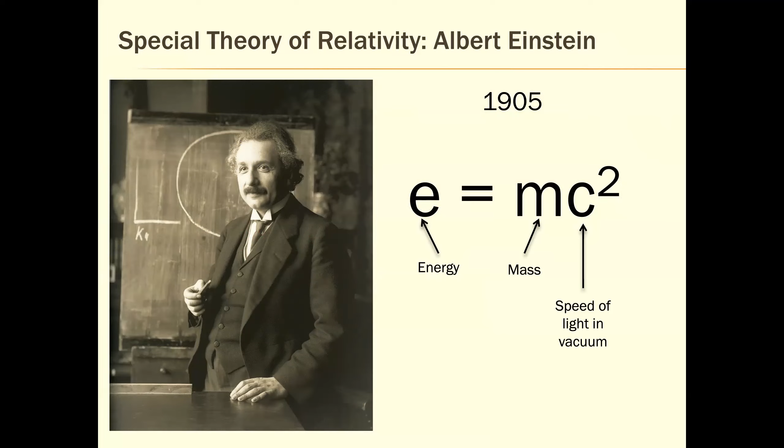Worldwide consumption of energy in barrels of oil equivalent, as of a couple of years ago, and I don't think it's changed much, was 118,300,000,000 barrels of crude oil. So we didn't consume that much oil, but we consumed energy equivalent to that much oil.

Energy is stored in fossil fuels in chemical bonds, and we combust those chemicals in order to extract that energy. And of course, this also leads to emissions of CO2, amongst other things.

If we could convert mass to energy by E equals mc squared, we could obtain the same amount of energy from only 8,055 kilograms, which is 3.2 of the new Tesla Model X's per year. So if we could convert 3.2 Teslas to energy with 100% efficiency, that would meet the energy needs of the world per year, in principle.

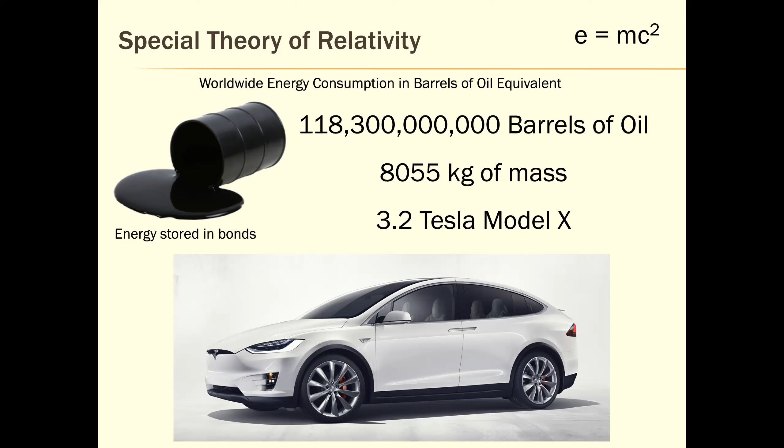Of course, we have no technology to do so, but things started to change in 1938 when two scientists, Hahn and Strassman, found experimental evidence for the fissioning of uranium via neutron irradiation and proposed the possibility of a sustained chain reaction in a nuclear reactor.

They weren't the first to come up with this idea. I think it had been around maybe about 6 years. Leo Szilard, I think, was the first to propose it, but they came up with some experimental evidence.

In essence, what they found was if you had a fissile isotope of uranium, in this case uranium-235, and a neutron interacts with that nucleus, with the neutron traveling at the appropriate speed, you will convert the 235 nucleus to uranium-236, which is very unstable and basically explodes into two fission products, as well as additional neutrons. These additional neutrons can then cause the same reaction for another uranium-235, so it can be a self-sustaining chain reaction, and it can also be an out-of-control chain reaction if the conditions are right. The applications are in commercial generation of energy with the controlled reaction, and the uncontrolled reaction in nuclear weapons.

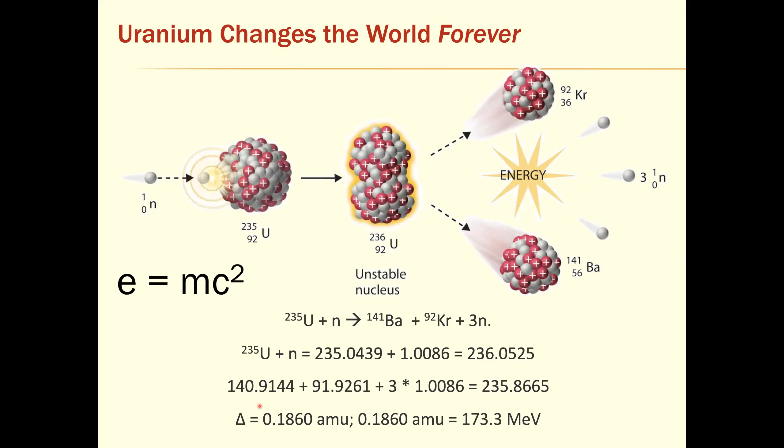This nuclear reaction releases a tremendous amount of energy. This is not like the primitive burning of fossil fuels where you release a little bit of energy that's been tied up in chemical bonds for millions of years, but rather it is conversion of mass to energy. If you add up what's on the left side, the neutron and the uranium-235 nucleus, and what's on the right side, you'll notice they don't balance in terms of mass. This fission process has destroyed, well, 0.186 atomic mass units has ceased to exist. In fact it's become energy, 173.3 mega electron volts. So there's an absolutely tremendous amount of energy available if we can split fissile isotopes in a safe and controlled fashion.

One uranium fuel pellet for a typical reactor is about the size of the end part of your finger. A dime is given there for scale. If we reprocess and recycle spent nuclear fuel, and use breeder reactor technologies, which I'm not going to talk much about but will mention again in a few minutes, they allow us to convert the non-fissile isotopes of uranium, which are the most abundant in nature, to fissile plutonium and burn that. If we do both of those things, one fuel pellet will give us as much energy as burning 300 barrels of oil, or 100 tons of coal, or 1.67 million cubic feet of natural gas. So the energy density of uranium is extraordinary.

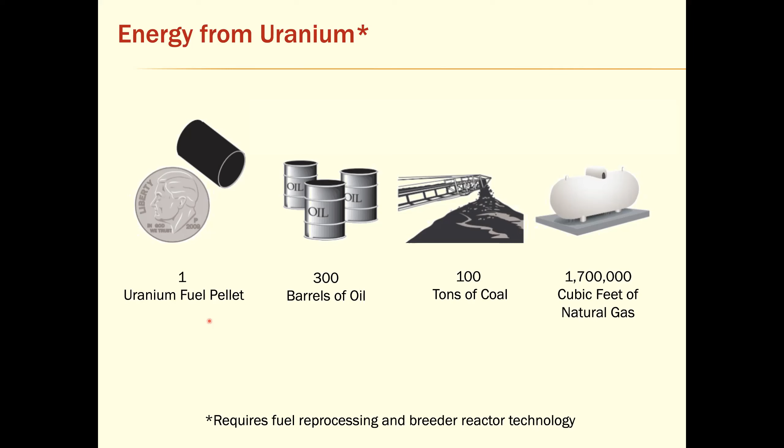This is the nuclear fuel cycle. It's my own illustration of it, because I never could find one I completely liked, but there are many different versions, essentially the same thing. We all know about nuclear reactors, of course. In fact, our electricity here tonight could very well be coming from the Cook power plant up at Lake Michigan.

But we don't often think about the other parts of the fuel cycle. So what I have up here is what we call the front end of the fuel cycle, the parts that occur before the reactor, and then the back end, which is essentially how you manage all the waste. At the front end, first you find uranium and mine it. It is possible also to run a thorium cycle, but in the US we currently don't. So you mine uranium, do whatever chemical processes you have to do to recover and concentrate it. Then for an American-style reactor, at least, we need to do enrichment of the 235 isotope. Out of the ground, uranium is 0.7% of the 235 isotope, and we enrich it to the 4 to 5 percent range for American reactor fuel.

And that's done in centrifuges, normally using uranium hexafluoride. Then it's converted to an oxide, fabricated into a fuel, and it goes into the plant, the actual nuclear reactor.

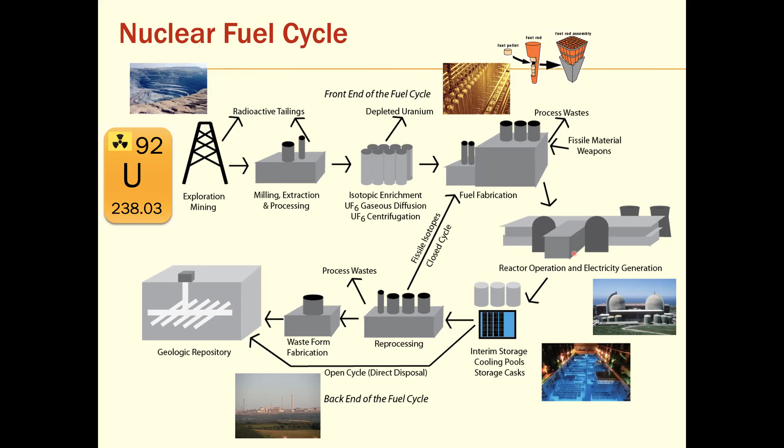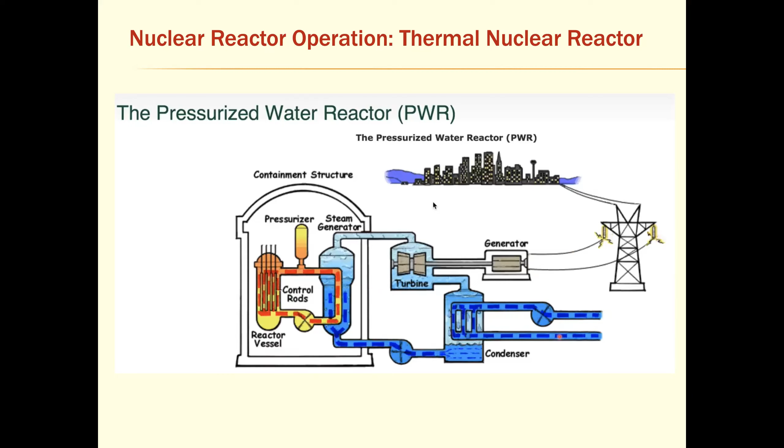This shows one of two major designs in use in the United States today: the pressurized water reactor. The reactor vessel is here, with control rods and containment around it, and then there's another big containment structure. There's one circuit of pressurized water that cools the core, then a steam generator with a second cycle that drives a turbine, and a third cycle that condenses that water to complete the cycle. So basically three closed loops of water. This is a very safe design because the chances of water being released out here are very, very low—you'd have to have multiple failures.

There's also the boiling water reactor. There are still a few of these left in the US, and it's a bit different because it only has two cycles, two circuits of water. You boil water in the reactor, creating steam that drives the turbine, and then that's condensed over here and sent back into the core.

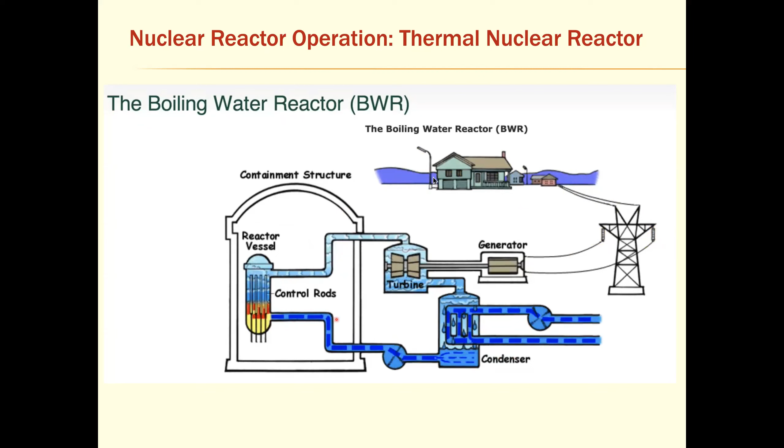Okay, nuclear is clean. Well, it depends how you want to count clean, I suppose, but what we've come to realize in recent decades, especially recent years, is that greenhouse gas emissions are a very major issue. So certainly nuclear is extremely clean relative to the emission of greenhouse gases. I give you here data from the literature, basically the amount of greenhouse gas emissions per gigawatt hour of annual electricity produced. You might wonder why nuclear isn't zero, since you're using a nuclear reactor, but you have to account for construction of the plant, which used concrete, and the mining of uranium, enrichment, and so on. So the life cycle is about 3 tons per gigawatt, whereas coal's 820.

Wind and solar are very similar to nuclear, again because they have to be constructed out of mined materials, transported, and so on. So coal and oil are the worst. Lignite is the worst of the worst, a subcategory of coal. Natural gas is better, and has less other harmful emissions, but it still releases plenty of CO2. On the bottom right is a bunch of above-ground storage casks.

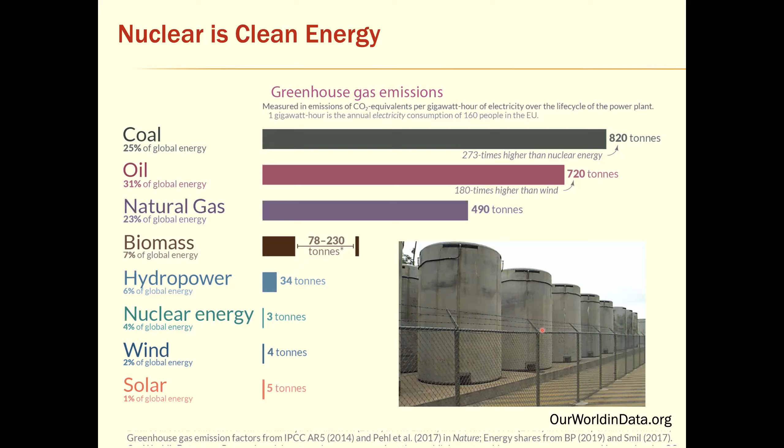So a few words about some of the accidents that have happened, because that's always an area of debate and concern when thinking about nuclear energy. The famous three are Three Mile Island, Chernobyl, and Fukushima. There are actually about another 18 or 20 pretty major nuclear accidents over the years, but some of them are not well understood.

They occurred in some cases on naval vessels in the former Soviet Union, for example. So we don't have a lot of details, but the big ones are here. Fukushima was the most recent, 2011, Chernobyl, 1986, and 3 Mile Island, 1979.

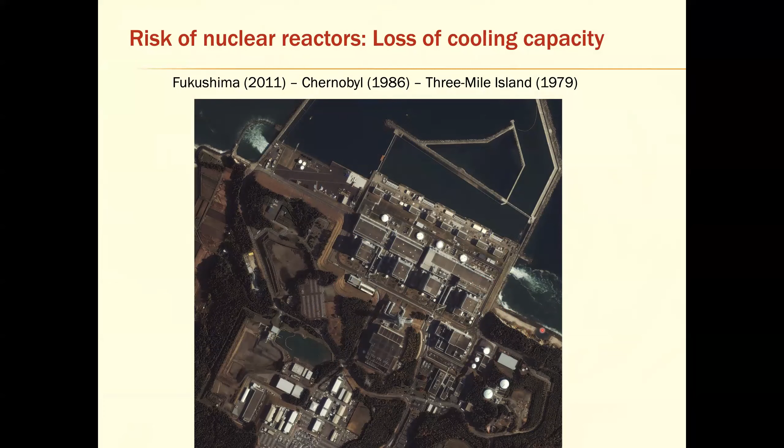3 Mile Island was the worst nuclear accident in United States commercial generation history. One of the reactors there had a serious thermal excursion and was damaged and partially melted.

As I'll show you in a few moments on another slide, the use of water as a coolant in a reactor creates a certain vulnerability. That is, if the temperature gets too high, the water or water vapor can react with the fuel cladding to produce hydrogen and oxygen. The hydrogen goes up into the top of the containment, and if there's a spark, you can have a massive explosion and lose containment.

So it's necessary, if you have this type of partial meltdown, that the containment actually be vented. That was done at 3 Mile Island, and it was done properly as far as I know, but it did result in the release of radioactivity into the surrounding communities.

Much emphasis was placed on that. Evacuation orders were put in place. It cost a lot to clean up the mess, but I don't believe there was a single death related to the radioactivity that was released during that accident.

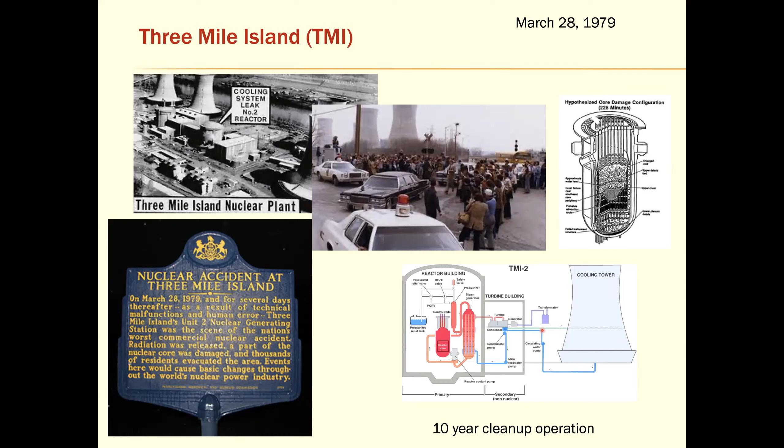I knew one gentleman who led some of the technical response, and he told me that they actually couldn't detect the radioactivity downwind that came from the plant because the background was too high coming from the coal burning facilities, which also released radioactivity. Of course, they release radioactivity during normal operations, a nuclear reactor only in very abnormal operations.

Chernobyl was a different story, though. I said 3 Mile Island didn't result in any deaths. Chernobyl certainly did. Some of you maybe have watched the HBO miniseries in recent times. It's actually a pretty fascinating watch, and some of it is kind of accurate, and some of it isn't.

Sorry, I don't know if you can hear it, but my computer is dinging.

Chernobyl was an RBMK-1000 graphite moderated reactor run in the Soviet Union. It was in Ukraine, and it was an inherently dangerous design. In American reactors, some of which were maybe not that much better, because we did run graphite moderated reactors in the weapons program, but in a typical water-cooled reactor, the water is a moderator and the coolant.

The water is moderating the neutron velocities in order to increase the reactivity while also providing coolant. And if you lose one, you lose the other. If your water all drains out, you don't have any more moderator. But the RBMK design is graphite moderated, so you have solid graphite moderating the reaction and keeping it going, and water is a coolant. So if you lose your coolant, the reaction is still moderated, and that in itself is kind of inherently dangerous.

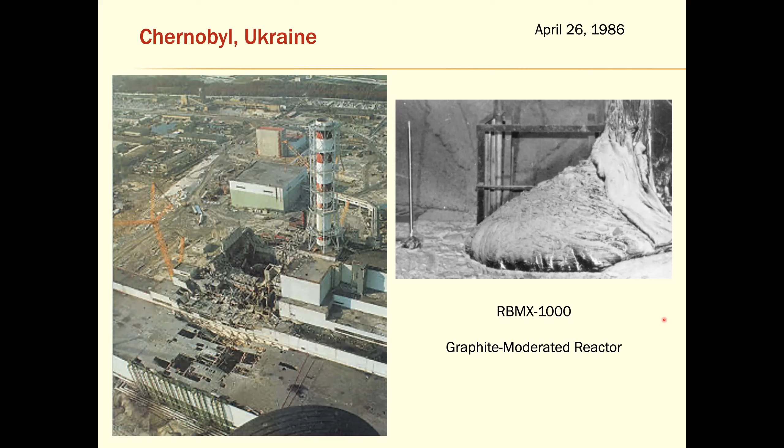Quite a bit of time has gone by, and various studies have been conducted. The one I'm going to refer to now was done about two decades after Chernobyl by the World Health Organization, on the legacy of this accident.

What they found was that about 1,000 on-site reactor staff and emergency workers had received very high levels of exposure on day one, and that something fewer than 50, but close to 50 deaths were attributable to that radiation. Another 200,000 emergency workers received exposures over the next couple of years cleaning up the site and building a temporary sarcophagus, and it's estimated that about 2,200 radiation-induced deaths will occur in their lifetimes.

In 2005, there had been 4,000 cases of thyroid cancer in children, with a 99% survival rate and 9 known deaths. Otherwise, the World Health Organization team, with 150 doctors, found that they couldn't find any evidence for increases in the incidence of leukemia or cancer amongst the affected residents.

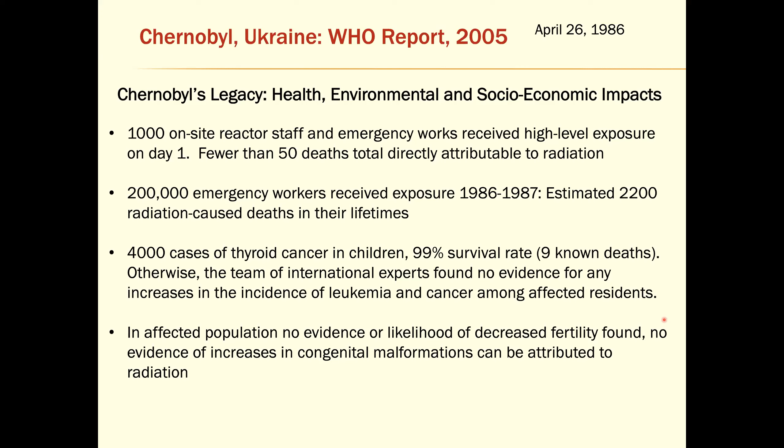They found in the affected population no evidence or likelihood of decreased fertility and no evidence of increases in malformations due to the radiation. Instead, they found that the really big impact was from poverty-related diseases. This was close to the collapse of the Soviet Union, mental health problems, relocation of 350,000 people, and terrible fears of radiation created mental health problems that were far more severe than the radiation itself.

The Fukushima accident occurred in Japan in March 2011. There are 6 reactors at the Fukushima Daiichi plant site - this is reactor 1, 2, 3, and 4, and then 5 and 6 are over here.

They're beside the ocean. On March 11th at 1446 local time, there was a magnitude 9 earthquake. The design basis of the reactors was magnitude 8, so they were designed to withstand anything up to an 8, but I'm talking Richter scale magnitudes here, and it's a logarithmic scale, so a 9 is 10 times more powerful than an 8.

Nevertheless, the reactors performed quite well. They shut down automatically as designed, and everything seemed to be under control until 1541, when a tsunami triggered by the earthquake, which was underneath the ocean floor, struck the site. Its estimated height was 14 meters, whereas the design basis was 6.5. The tsunami completely inundated the site, flooded the basements, washed away fuel tanks, etc., and all on site power was lost.

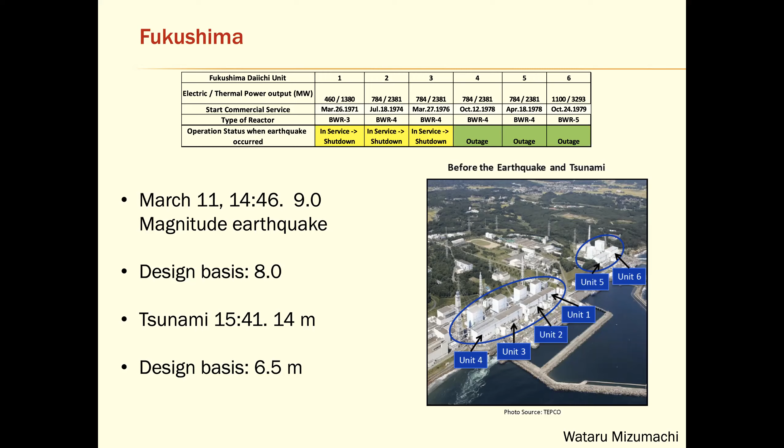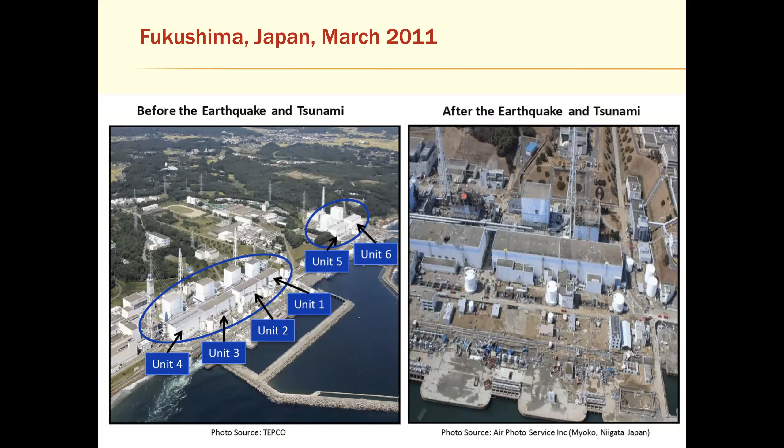As I mentioned before, during the heat excursion, water interacted with fuel elements and the cladding, producing hydrogen gas that accumulated within the containment. Although I understand some venting was done, it wasn't successful, and units 1, 3, and 4's containment were entirely destroyed by explosions. These were not nuclear explosions, they were hydrogen gas explosions, but they destroyed the containment, and now you've got exposed melting nuclear fuel basically open to the atmosphere.

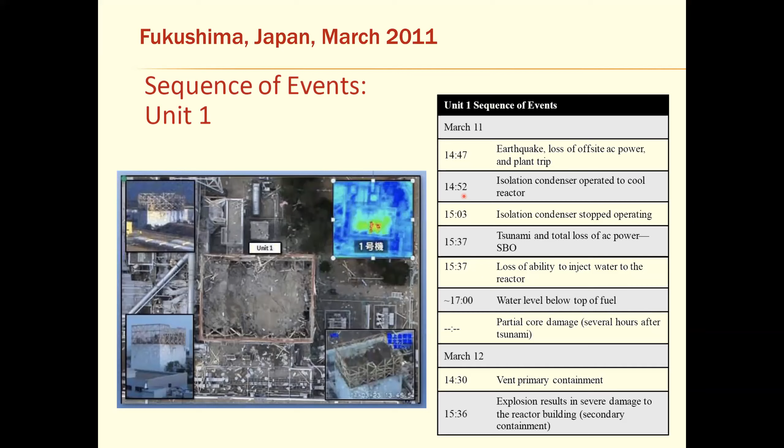The exact details are basically similar - they didn't all explode at the same moment in time. They were able to cool some of them for a longer time than others. It was a General Electric Mark I reactor design, and this is a schematic of what was there. The secondary containment area up at the top was what was destroyed by these explosions, and the primary containment and the fuel core was impacted by the temperature excursion.

The hydrogen gas was produced by the interaction of water with fuel. Fuel itself melts at about 2600 to 2800 degrees C, which of course is very, very hot. But you don't need to get that high to have the hydrogen problem.

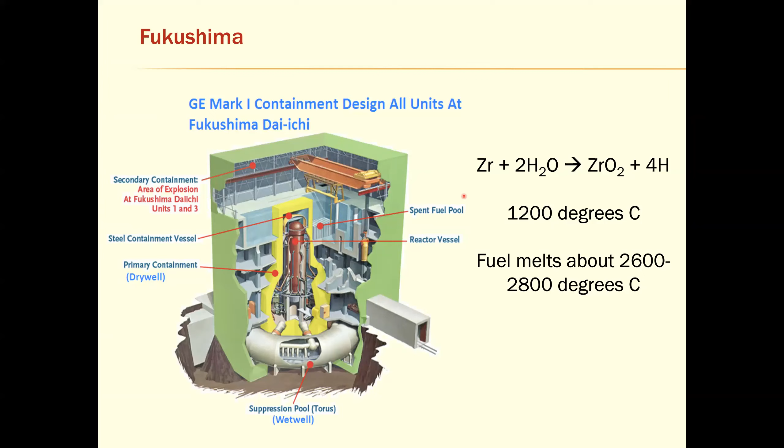I know folks that worked in Washington State, and they were able to detect fallout from this accident, but only with the most sensitive instrumentation and most careful measurements. I'm not arguing that fallout wasn't an issue, but this type of misinformation campaign can cause a lot of panic in the populations and can do a lot more harm - it can do no good and it can do a lot of harm.

So nuclear is safe. I've just told you about 3 major accidents, and so it might seem odd that I will now turn to the topic of safety, but there have been academic studies, not my own, of the safety of energy production. This is the number of deaths per terawatt hour of energy production.

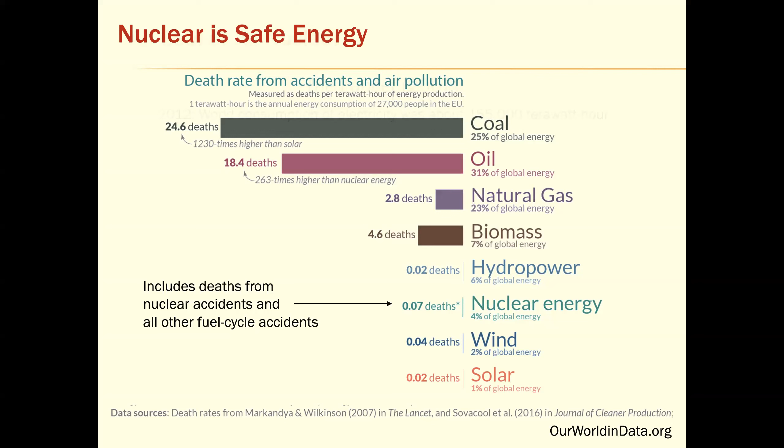Nuclear is very safe when you look at it overall, relative to the amount of energy produced and the corresponding number of deaths. An interesting study that came out 13, 14 years ago looked at the average world consumption of 155,000 terawatt hours of electricity per year. If you generated that with coal, you could attribute to it 3,797,000 deaths per year, whereas nuclear would be 8,200. So although nuclear is not without some risks, it is far safer than most sources of energy.

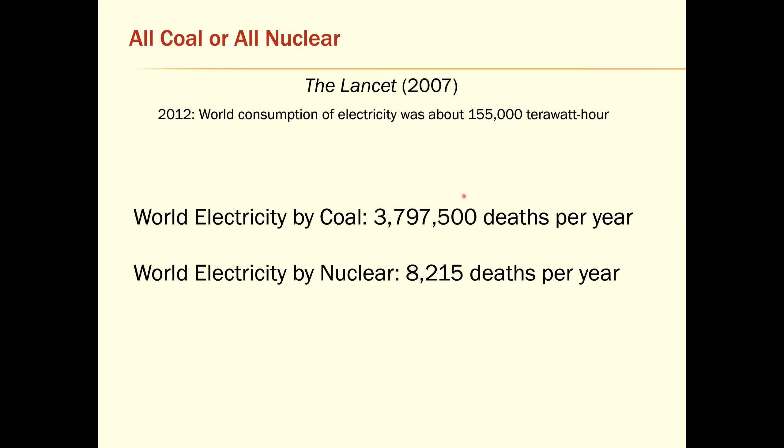Okay, next myth: no level of radiation is safe. I cannot say with 100% certainty that this is fiction, but neither can anybody say with 100% certainty it is fact, because there's no evidence to really support either position.

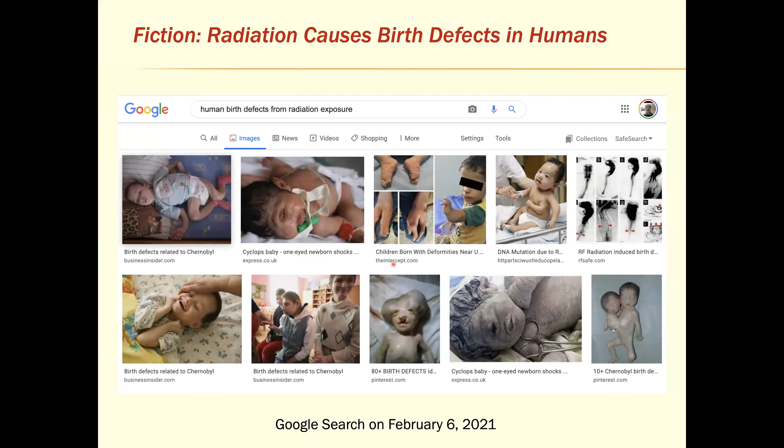This next part is not very pleasant, but there's a myth that radiation causes birth defects in humans. When I Googled that on the weekend — human birth defects from radiation exposure — that is what my screen contained. Every one of these is a lie, such as birth defects related to Chernobyl and so on. These are all lies, but that's what the internet gave me, such as it is.

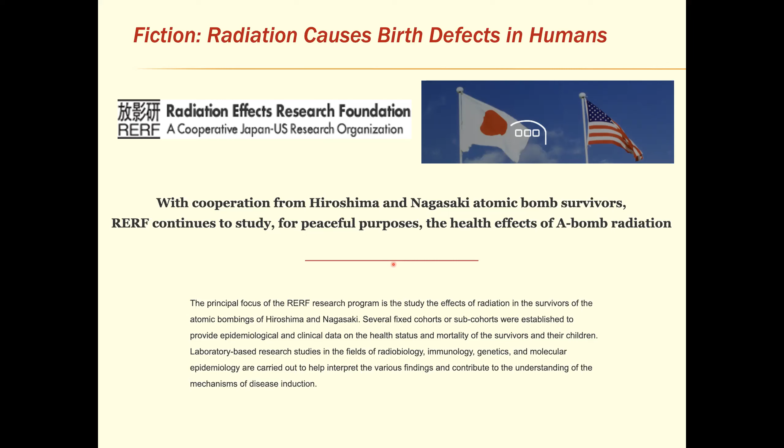How do I know those are lies? Well, we already talked about the Chernobyl information from the World Health Organization, but more significant is what happened in Japan after the nuclear weapons attack. As you all know, the United States dropped two nuclear weapons on Japan near the end of the Second World War, on Hiroshima and Nagasaki. Very shortly after the war, the United States and Japan created a research foundation to study the radiation effects on the affected people, and not just them but their several generations. This foundation continues to conduct research today, and you can go to their websites and see their most recent reports.

Most people think the Hiroshima bombing killed everybody, but that's not the case. It killed about 100,000 people out of a population of about 250,000. What this created, not intentionally of course, was the biggest study of all time on the radiation effects on humans, because about 150,000 people survived, and this research foundation has been studying cohorts of those survivors and their descendants ever since, updating their report every year or two.

But the myth I really wanted to address was that radiation causes birth defects in humans, because that's the one we hear about so often as a negative side of nuclear energy. I don't know if I can blame it on The Simpsons — I've heard of them, it's some cartoon, but I've never watched a single episode in my life, so I don't know if that's the cause. But according to this study of 150,000 or so survivors and their children, there are no inherited genetic effects from parental radiation exposure among the children of atomic bomb survivors.

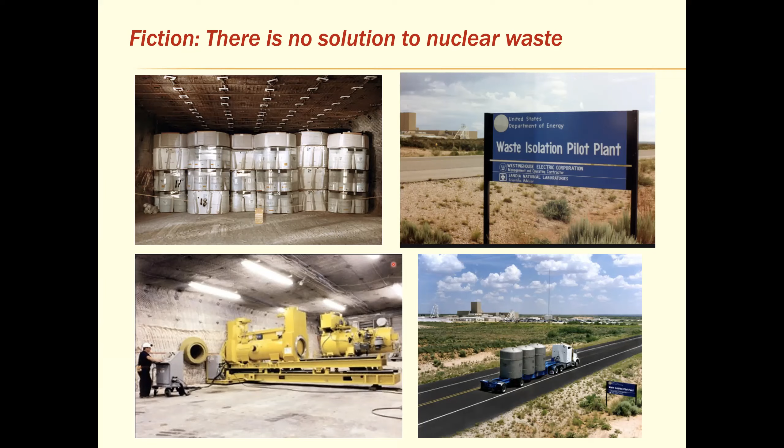No solution for nuclear waste management - that's another myth I will argue. First of all, we have solved it. These are pictures taken inside the Waste Isolation Pilot Plant in New Mexico, where nuclear waste is being safely disposed of about 2,300 feet below the surface in salt. This site has been operating since the 1980s. We don't hear much about it, mostly because it's weapons-related waste, not commercial waste, and as a result the details are less public. But this site has been operating for a long time, and with the exception of one accident in which nobody was really hurt, in all those years it's run rather well.

The United States had a plan, and it was to dispose of our commercial nuclear fuel waste in Yucca Mountain, which is in Nevada. It's on the Nevada Test Site where nuclear weapons were tested. So obviously there's already a contamination issue there, because over 700 nuclear weapons were detonated on site. The first few were atmospheric tests, and then they were underground. So it's already federal land, federal reserve, and so on. I personally was involved in a lot of research to develop the scientific consensus that this site would be suitable. But politics got in the way.

The Nuclear Waste Policy Act, passed by the US Congress in 1982, said we're going to go with disposal, geologic disposal of commercially generated waste. That act was revised and amended in 1987 to lay out exactly how the process would unfold, specifically for the case of Yucca Mountain. So in 1987 the other sites that had been under consideration were taken out of the mix, and the process went along. A lot of scientists, engineers, and other scholars too were involved, and built a safety case.

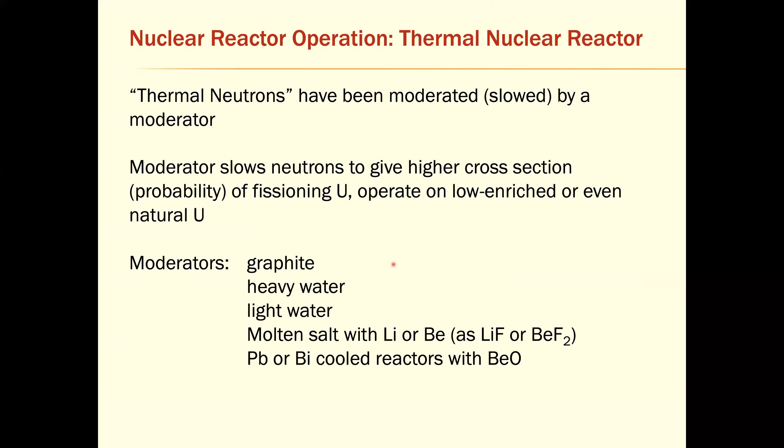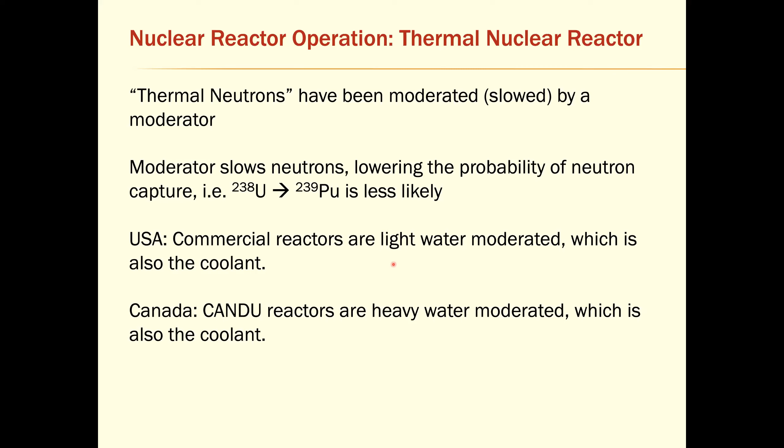So, not enough uranium - this would be the argument that nuclear is not sustainable. It's certainly not renewable, because it is a finite resource, but is it sustainable? I suppose it depends on how you define it, but I will argue it is. In our normal reactors in the United States, they're what we call thermal neutron reactors. We use moderators to slow the neutrons and decrease the probability of breeding plutonium - moderators like graphite, heavy water, light water, and so on. It's mostly so we reduce the amount of plutonium that's being produced. In the US, all of our reactors are light water moderated. In Canada, the reactors are heavy water moderated. In both cases, the water is the coolant as well.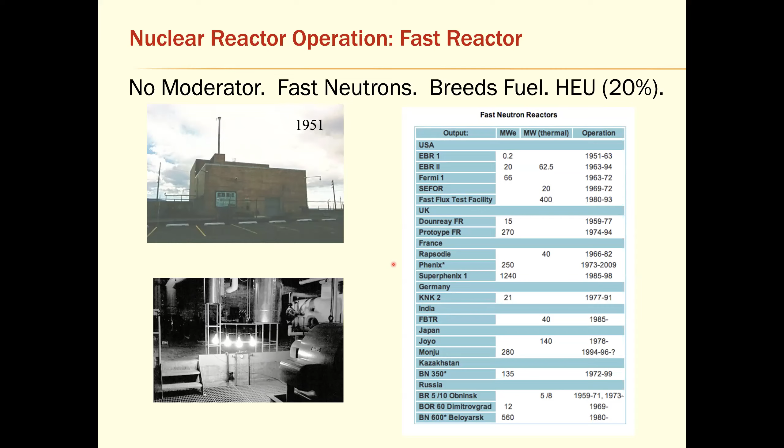So now we've got our current open fuel cycle, where we run our uranium fuel through the cycle and call it waste, to go to some unknown repository. That's not terribly sustainable — decades at most, certainly not into the hundreds of years. I think we have enough for a few decades.

A closed uranium fuel cycle is when we recycle the fuel, largely to remove the neutron poisons that grow in during reactor operation, allowing us to use the fuel more, because the fuel's never actually really spent — it's just dirty and used. And then one can go to a closed uranium fuel cycle with breeders, and that takes you from hundreds of years of uranium supply to literally thousands.

There's also the thorium fuel cycle, which I haven't talked about. There was a thorium demonstration reactor run at Oak Ridge in Tennessee in the 1960s. The thorium cycle has different challenges and benefits, and there's even more thorium in the Earth's crust than uranium. So my conclusion is, if we take all of the energy used in the world and apply a reasonable growth curve, we can meet 5,000 years worth of the world's energy needs — all electricity, all processes, transportation, etc. — if we took it to the extreme possible boundaries as we know them today.

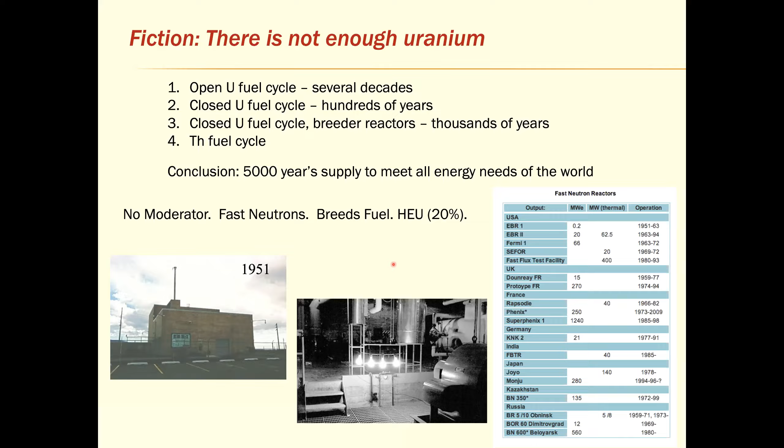I'll spend the last couple minutes talking about the future. As I mentioned earlier, I'm not as confident in my knowledge of the future as I am in some aspects of the past, but I do know a few things I want to share with you.

The first is that nuclear power reactors have gotten steadily safer and more efficient, and the designs are significantly better, although we haven't brought a lot of those new designs to market in the United States.

Think of an analogy: it was possible to fly across the North Atlantic in the 1930s, maybe commercially by the 1940s. People did it, but we certainly wouldn't want to fly in one of those planes across the North Atlantic today. Instead, every cycle of airplane design and development made a safer and better airplane. The same thing has been going on in nuclear since reactors were first built in the 1940s.

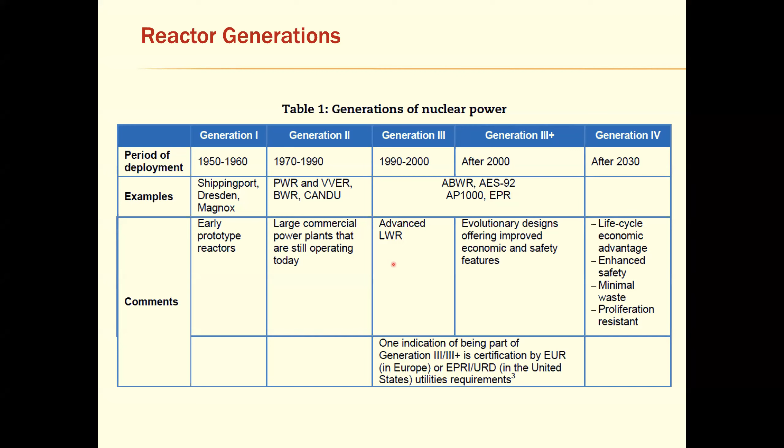We haven't built a new fleet of ultra-safe reactors in the United States, but we do have the designs, and scientists and engineers have been working on them continuously. I'd also note that the US Navy has been using smallish nuclear reactors since the 1950s on ships deployed all around the world, and has done so in a very safe and effective fashion. So we have a lot of technologies that could be brought to bear.

Sustainability is a major emphasis, and that means using your fuel wisely. That means reprocessing, it means breeder reactors — basically taking the uranium we've already mined and reusing it over and over again, while greatly minimizing the waste and the long-term burden associated with it.

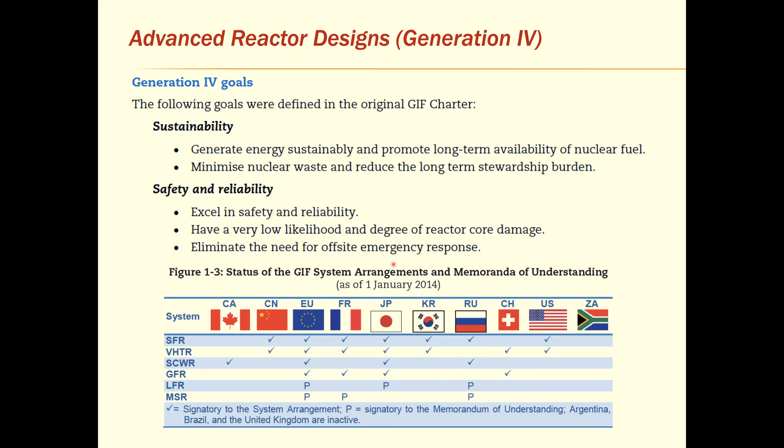I think it's pretty much a given that we've got to move away from water as a coolant. That's a major risk factor for nuclear accidents, because of the adverse chemical reactions that produce hydrogen gas. There are a lot of studies underway demonstrating really good ways around those problems, including gas-cooled reactors, lead-cooled reactors, molten salt reactors, sodium-cooled fast reactors, and so on.

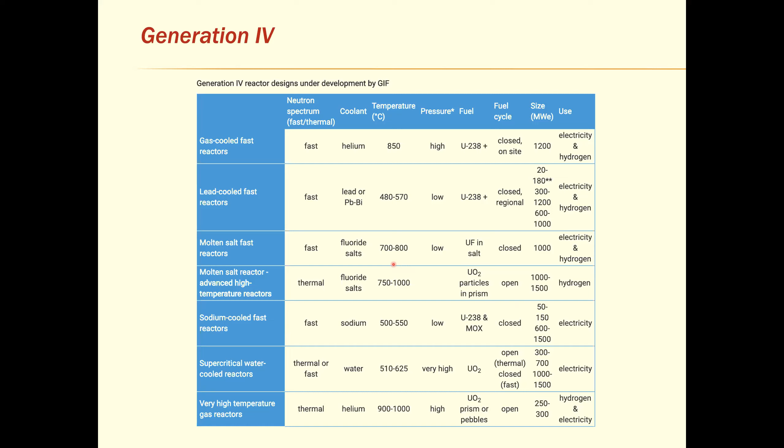I don't think there's any real need to go into all these details, but rather I'd like to spend a moment painting a broader picture of what I think is possible in the not too distant future.

That will be the introduction of small modular reactors. These will be Gen 4 reactors that have inherent safety — they will not require active cooling, they'll be passively cooled, and won't require electricity and pumps and so on in order to keep them from melting.

They will be small enough to be transported on a truck, although in the illustration it's not a small truck. The idea is, don't go to a bunch of different locations and build reactors — build them at centralized facilities, factories, where you concentrate the expertise, then transport them to the sites where they will be assembled into larger reactor parks.

One of the aspects that makes this idea especially appealing is it streamlines the process of regulatory compliance. You will no longer have a lot of different reactors under construction, all of which have to be licensed separately. Instead, you'll have a small number of companies producing these under single licenses, and then they can be combined into a scalable source.

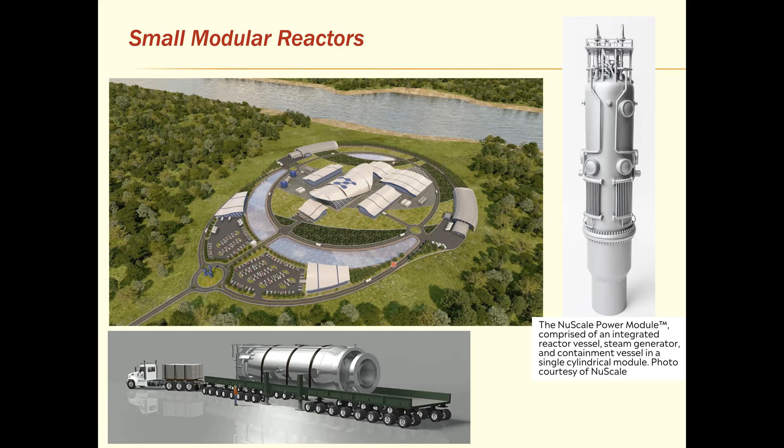This is like an artist's rendition of what a plant might look like, where you can have several different small modular reactors working together, or you could just have one, or even more as the need might exist. I don't think these are that far off—there are companies in the testing stage now.

I think we could dream kind of big and say we might be able to have a nuclear powered University of Notre Dame in 20 years and achieve zero emissions, zero CO2 emissions. I don't think that's an impossible scenario. I guess I better stop, so there'll be a little time for any questions or complaints or observations—anything's welcome.